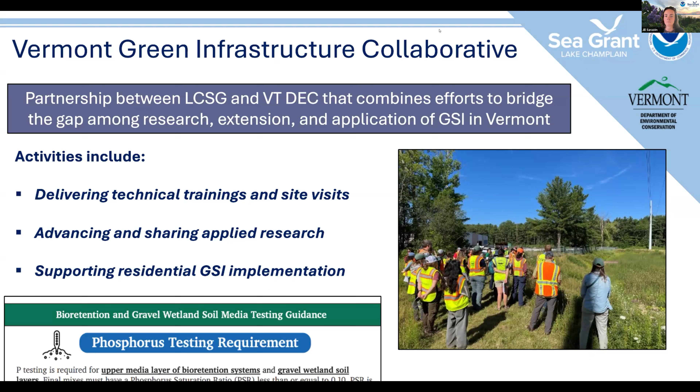I think you're on mute, Jamie. Thanks a lot. Yeah, thanks for having me. It's great to be here.

Gravel wetlands, or subsurface gravel wetlands, are one of my favorite topics. It's something that we started testing when the Stormwater Center first started in 2004. And as you'll see, it's one of our best performers.

If you're not familiar with a gravel wetland, it's largely a two-cell horizontal flow subsurface wetland system. I say subsurface because there's really not standing water on the surface in the basin geometry where the water quality volume is stored. All the action is happening underground as it travels horizontally through this network of gravel interspersed with the dangling roots of the different wetland plants growing in the system. So it's great if you have the space.

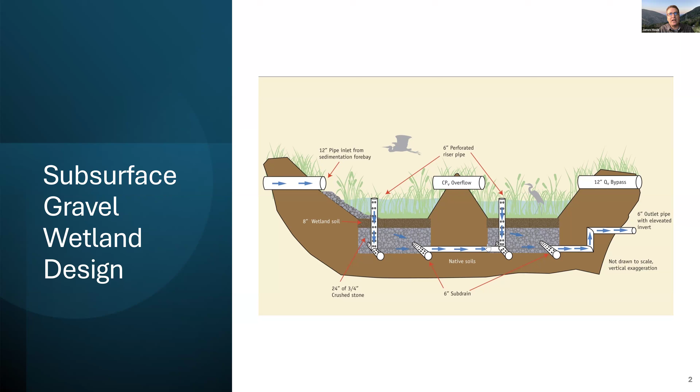Really, the two big things around gravel wetland installation are ensuring that you have low conductivity subsoils, such that the water is traveling in a horizontal direction as opposed to a vertical infiltration direction, and construction of an outlet control with an orifice that drops the internal storage, or basin storage, within a 24 to 48 hour period.

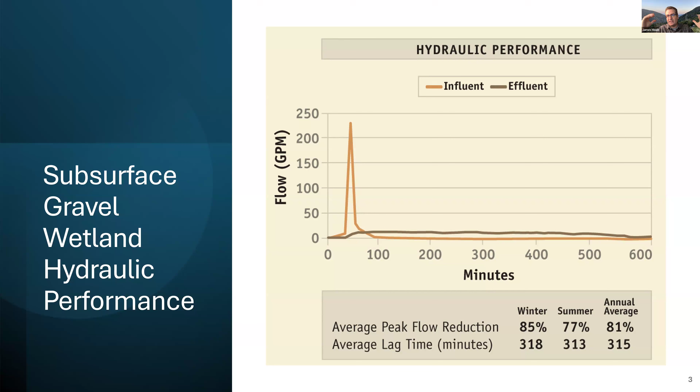When we look at the water quality treatment, as I said, it's probably our top performer. It might only be rivaled by, say, a permeable pavement system, where the vast majority of treatment we're expecting happens through infiltration into the native subsoils. But from actual chemical processing, this system by far is one of our top performers.

When we look across the range of unit operations and unit processes that the system employs, it hits about every one known in the stormwater engineering world. So everything from settling in the forebays to vegetative uptake to microbial mediated denitrification in the subsurface saturated zone, and adsorption and others as well. I think it's the microbial aspect in the subsurface that is really doing the bulk of the work.

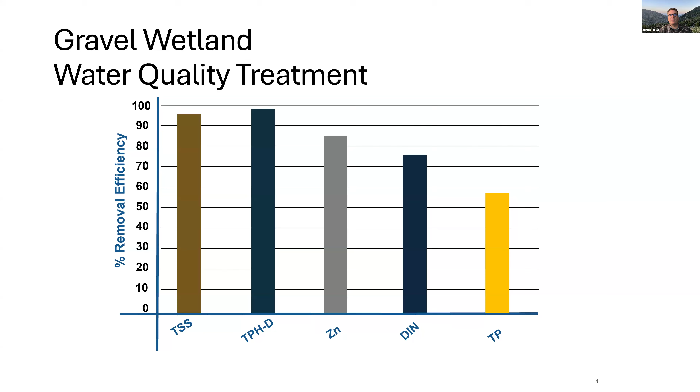I should at least note that everything I'm going to say today is embodied in our gravel wetland specification, which we update periodically. The last update was 2022. We're getting ready to update it again with a lot of the phosphorus testing criteria that Dr. Eric Roy and Dr. Stephanie Hurley have come up with at the University of Vermont. We work closely with Vermont, and I think Vermont holds a special place as probably the earliest and most prolific adopter of subsurface gravel wetlands as a treatment system.

When we look at the range of different treatment characteristics, of course we're looking at that water quality volume, which is largely still how we're designing a system, although that's slightly changing.

So when you look at resources like the Southeast New England Program retrofit manual and even the most up-to-date New Hampshire manual, you'll see some variability. We're transitioning to use of the performance curves that are embodied in Appendix F of the Massachusetts and New Hampshire MS4 permits as a way to really quantify the performance of our structural controls.

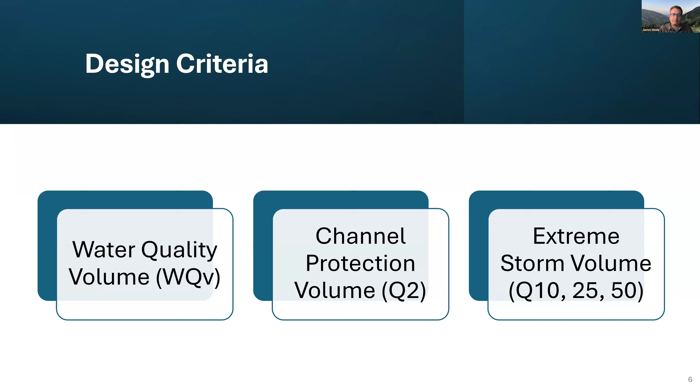All right, so pre-treatment is one of those things that we've kind of changed our opinion on. In most stormwater manuals throughout New England, a structural forebay is required. We've seen problems even within our gravel wetland systems of that structural forebay sometimes being designed dry, which is necessary in the subsurface gravel wetland, but often operating wet due to settling or other things that may be happening in that forebay.

So even though in the stormwater manual they might call for a volumetric forebay design size for 10% of the water quality volume, we have allowed for things like upstream, offline, deep sump catch basins to provide that pre-treatment. This, at least in New Hampshire, requires a waiver from alteration of terrain, but oftentimes that's no problem. We know that functionally the forebay really is there to provide a quick and easy accessible area for more routine maintenance. So that's really the ultimate goal.

And then the two treatment bays are sized for 45% of the water quality volume each. There's been a lot of discussion around why 2 treatment cells, and the short answer is because that's what we studied. This was originally borrowed from the Georgia State Manual.

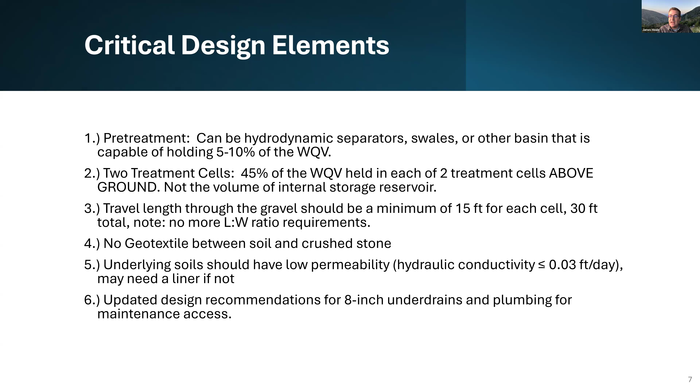Underlying soils, again, for the subsurface gravel wetland, should have low permeability, and that's to force that horizontal flow. We've also updated our guidance for any subsurface underdrains across any structural control to an 8-inch minimum pipe. And that's mainly for maintenance access in the post-construction condition.

So again, I won't go into too much detail, just limited on time, but a lot of this information is in our specification. The general anatomy of a gravel wetland is a 30-foot travel in the subsurface of stone, could be 3/4-inch stone, that's most typical, but we've also seen a range of different stone varieties. The key is that you have this intermediate layer, which is this pea gravel, and it creates a setting bed that allows the more fine materials above it to set above more coarse materials.

So there is some variability within the specifications of the stone layers, but typically it's a 3/4-inch stone that's widely available here, with that intermediate layer being a pea stone or 3/8-inch stone. And then, of course, the key is all in the outlet structure. If you don't have low permeability soils, you might consider using a different system.

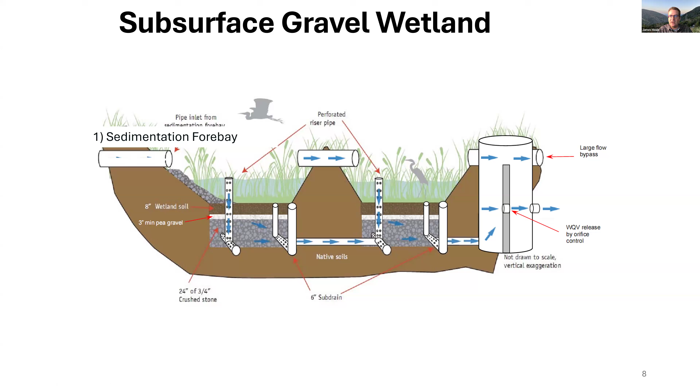If you need nitrogen control in particular, we've been modifying bioretention systems with internal storage reservoirs, which provides the same denitrification as the subsurface gravel wetland. And I'll show you a little bit of some of the advancements with the hybrid systems at the very end, time permitting.

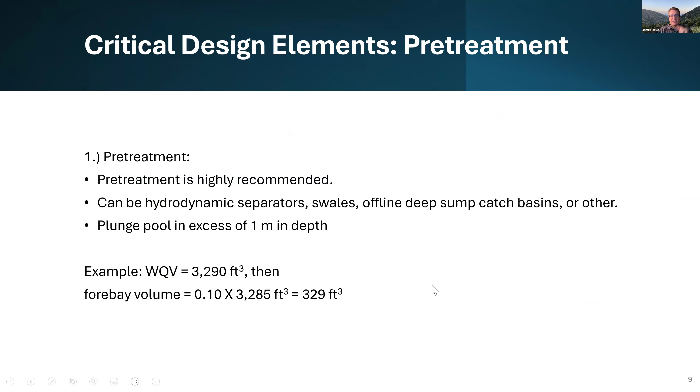So for pre-treatment, I discussed that commonly a volumetrically sized forebay is used, but there are other options. I don't want to limit your creativity to only a volumetrically sized forebay. One of the other areas we've innovated is around the hydraulic inlet.

If you think about the muck soil, as Vermonters call that wetland topsoil, it's really critical that we get that right, because we're not trying to promote vertical infiltration. If that muck soil is too permeable, like a typical bioretention soil, you could get short-circuiting of the plug flow path, which is really important to a horizontal flow gravel wetland system. By plug flow, I mean we create a hydraulic inlet at the front and push water horizontally through the subsurface. If we have too much infiltration down at the end of the system through the soil, that interrupts and short-circuits our plug flow conditions, which we feel is very important to overall treatment performance.

We used to use perforated risers as the hydraulic inlets. They can clog, and we noted a need for redundancy in these systems, since it's very hard to maintain these perforated risers. So we've since modified the inlet.

Where you have your inlet pipe into the gravel wetland area, we've modified that with a splash pad using 4 to 6 inch large diameter stone overlaying a woven geotextile. There are lots of reasons why we use woven geotextile—I won't get on my geotextile soapbox because that'll take a lot of time—but we use woven mainly for durability and maintainability. We can remove that 4 to 6 inch stone periodically and replace the woven geotextile over time. That's been the big modification on the hydraulic inlet.

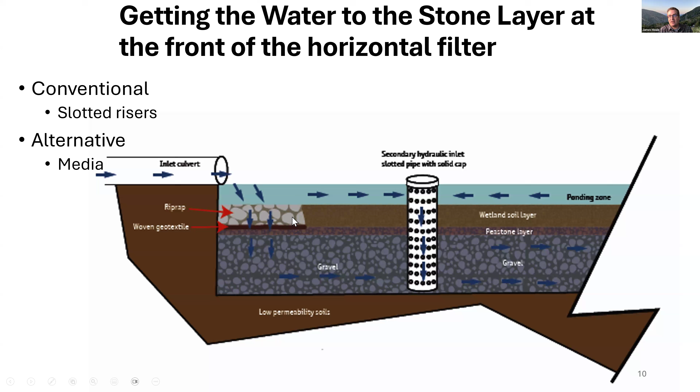I'll talk about the muck soil layer—that's an area of continued research and development, and I'll go into that a little bit later.

The next, and almost most singularly important, area is the design of the hydraulic outlet. If nothing else—if you have low permeability soils, which is often difficult for engineers developing stormwater management in areas with poor soils—this system is very amenable to the use of a subsurface gravel wetland. If you don't have those soils, you'll need some type of liner.

Outside of the low permeability native soils requirement, the outlet structure does pretty much all the rest of the work. In the outlet structure, we have multiple flow controls. The primary flow control is a low orifice sized to drain the water quality volume, or the upstream retention volume, over a 24 to 48-hour period.

The invert of that outlet control is elevated so as to maintain an internal storage reservoir of water. That reservoir is key because, between events, it takes the oxygen that's in stormwater and drives it down through microbial activity to anaerobic conditions, relatively quickly—within hours of a storm event. We'll see oxygen that comes in during a storm drop to about 2 milligrams per liter of dissolved oxygen, which is really important for denitrification to happen. That's why we maintain that internal storage reservoir.

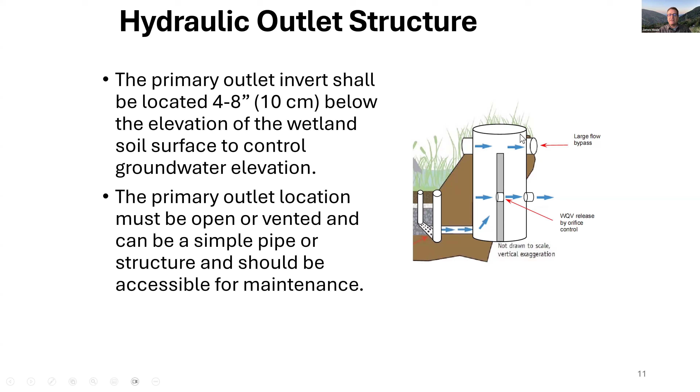The next controls are, again, to control the channel protection volume. You'll have another outlet control—sometimes a weir, as shown in this outlet structure—designed as the secondary control to bypass the Q2 event. Then you'll have some high flow contingencies as well.

Let me go into the next big innovation we've come up with on the outlet control, mainly from inspection and maintenance of these systems. It's really important, when designing your outlet control, to maintain that the clean side of the orifice receives only clean flow. I have some pictures to show you some of the mistakes that we've made.

The reason being, that orifice control can sometimes be as small as an inch. If you have water coming into your outlet structure that's skimmed from the surface and might have organic debris, or is conveyed from other areas with higher coarse sediments, that outlet structure could clog.

It's really important that on the clean side of that orifice control, you're only getting filtered flow from the underdrain of the gravel wetland. You could have a solid access cover on the clean side for maintainability or inspection, but your grated drain is on the dirty side of the orifice control, so that any debris or organic material is flushed through the high flow outlet and not getting stuck on the clean side of that orifice control.

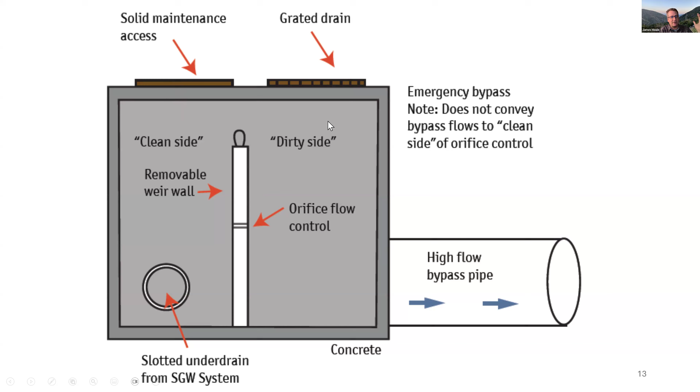That's the thing we're trying to correct. And there it is with the high flow bypass. We got the grated inlet here, right? But again, we would minimize or eliminate this altogether. Alternatively, you can put that bypass in a notch in the side of the structure, or you can provide another contingency for high flow bypass around the structure itself. So there's other ways to do it. Just do not let dirty water on the clean side of that orifice control.

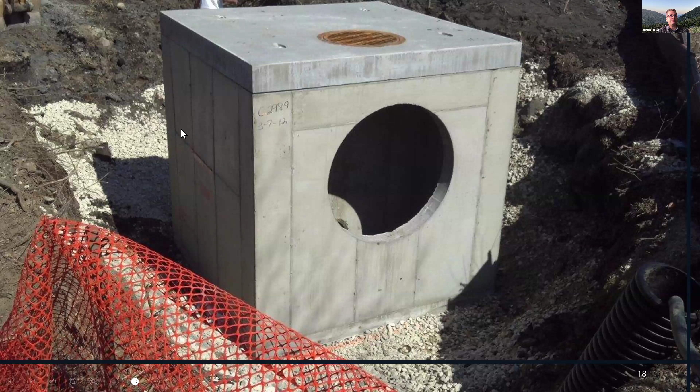Outside of that, there's really not much to it. There are additional criteria, again, for the muck soils. This specification is on our website. It's also in the new New Hampshire manual that just came out in February. In addition, I know that Vermont has specifications for this as well, and I looked at them in preparation for this, and they're basically the same.

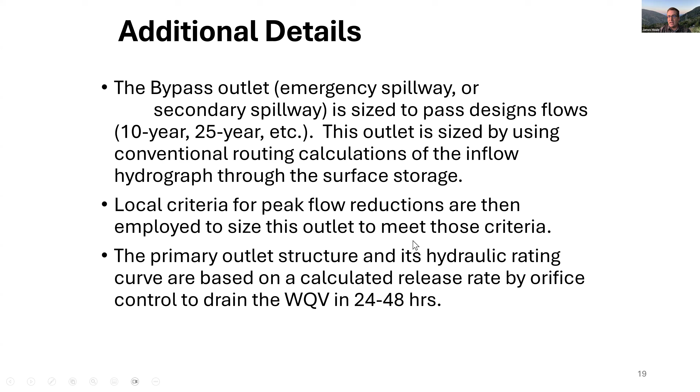The difference is updating the testing of the wetland soil with respect to the soluble reactive phosphorus, and using more of the Mehlich-3 digestion in order to assess that. I'll go over that a little bit later. So the wetland soils covering the surface should have low permeability, as opposed to what we commonly prescribe for bioretention soils. And again, the idea here is you want horizontal flow through the stone. You don't want vertical flow through the soils, which is the complete opposite of how we design bioretention, which is more vertical flow dominated.

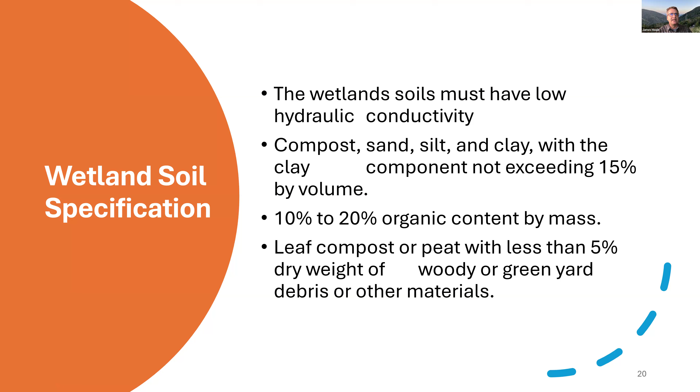Early on, we said this should be a mixture of everything: compost, sand, silt, clay, with that clay component not exceeding 15% by volume. We were worried about cracking potentially of that soil with greater clay content. If you just use a straight up wetland soil, as the system dries out, which it's prone to do in this type of application, you could get cracking and opening of surface cracks on that wetland soil, and thus short circuiting of your horizontal flow path. So this is kind of the science in trying to get the right mix: 10 to 20% organic matter by mass.

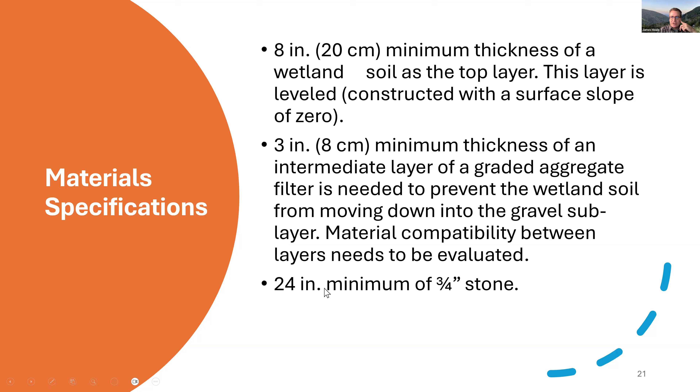We've seen all kinds of different things as far as that wetland muck layer. In the subsurface, it's a lot easier. We have an 8-inch thickness of wetland soil minimum, then a 3-inch intermediate layer, often just pea gravel, and then a minimum 24-inch gravel in the subsurface. So pretty easy to construct from the bottom up.

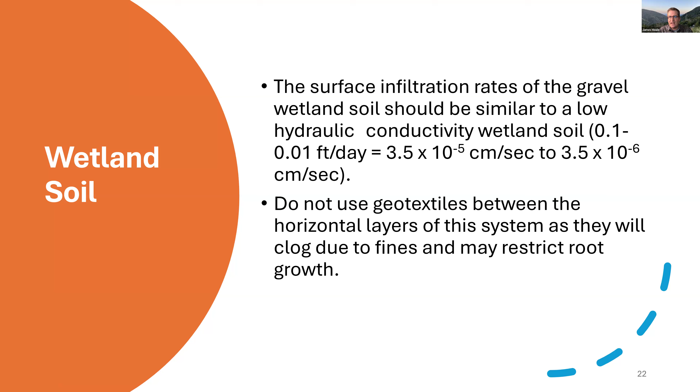We don't want geotextiles in the horizontal cross section of a bioretention because we're worried about clogging. But here too, you have wetland plants and you want those roots to go into the saturated zone in the gravel subsurface, and a geotextile could potentially block those plants, or at least not facilitate their migration into that internal storage reservoir. So we don't like the use of geotextile.

Like I said, we got all kinds of mixes. The most humorous one we got is they prescribed gravel, that pea gravel, all the way to the top, and that certainly is not something we're looking for.

The other issue we've seen is people mixing existing soil from other sites, which I think is a great application, but they could have rocks or other woody debris. We rejected a couple of soil samples with huge, like 3-inch boulders, and a 3-inch boulder has a risk of potentially bridging that 8-inch minimum wetland soil. Or things like logs—we had big branches, 6-inch diameter, feet long. When we have stuff like that, what we're worried about is bridging the surface to the subsurface and short circuiting that horizontal flow.

So our best approach was to develop a particle size distribution, which we did, and updated in our new specification that has some tolerances for too big of material and some tolerances for that particle range of what that material should be. Again, it's a work in progress. This is not an exact science, but you should have an eye on that material to avoid vertical infiltration over the long-term operation of the system.

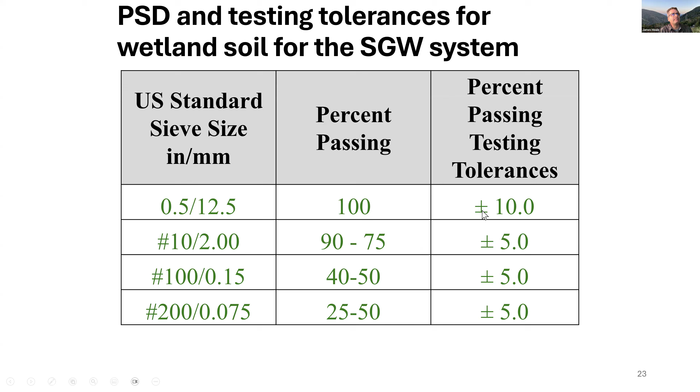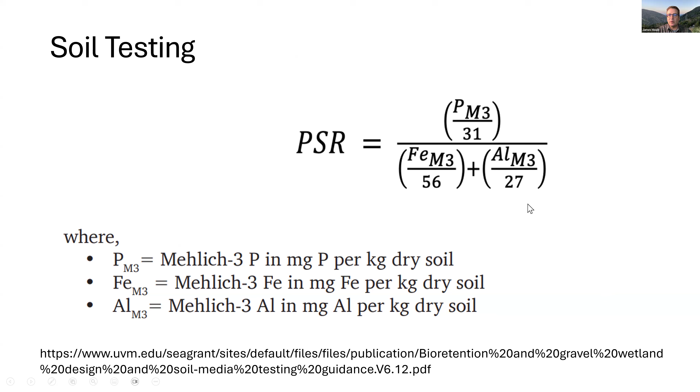For soil testing, we used to prescribe things like phosphorus index, typically done in an agricultural lab, but UVM has helped us update this, and we're stealing this directly from the bioretention and gravel wetland soil specification that Jill showed earlier. That will be in our spec coming out soon. It requires more of the Mehlich-3 and evaluation of the phosphorus saturation ratio component, because we don't want those soils contributing to excess phosphorus.

Vegetation is the other really difficult piece here. We've opted for seeding it just because these wetland soils come from all walks of life. They're in all different locations—some are shady, some are sunny—and purchasing a seed mix is probably the most suitable for self-selecting the wetland plants that will grow.

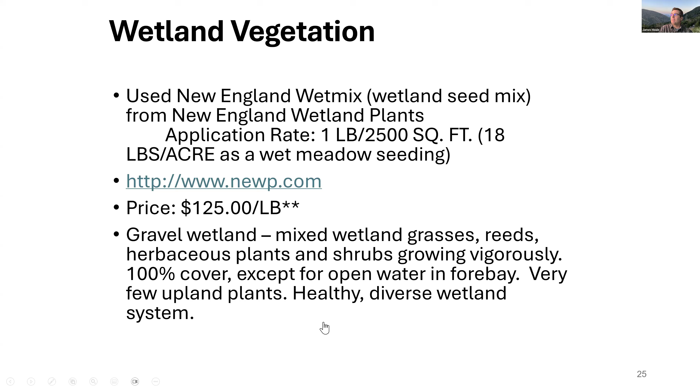We have accepted gravel wetlands that were temporarily stabilized with a contractor mix. I think that's fine, but over time we'd like this to be functioning with wetland plants, and the beauty of a system like this is obligate and facultative wetland plants can grow in it and benefit overall pollutant reduction.

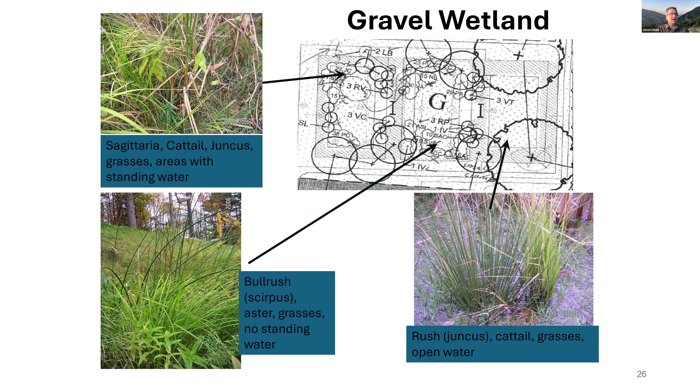In our original installation, we had done lots of plugs and potted wetland plants. We found about 53% of the planted species were still present, which is good, but that means 47% of what we planted, probably about a $20,000 planting pallet, had just disappeared.

So they're a mix of obligate and facultative species. The key to eliminating some of the more invasive species that may come in is having that early, dense vegetation before the system comes online, making sure the vegetation is dense and well established in the system.

Other questions that have come up over the years are with respect to ponding depth. One of the benefits of a system like this is you can potentially deal with peak flow controls and have more storage area available for larger storm events because it is temporary.

We don't really have guidance on ponding depth—it really goes back to sustainability of the plant species selected. More ponding means that's going to selectively control what plants are able to be sustained in that system. Our system itself that was tested was 18 inches ponding, which is where we settled on a preferable level. But again, this is somewhat flexible, and I think it's more akin to what you're planting the system with.

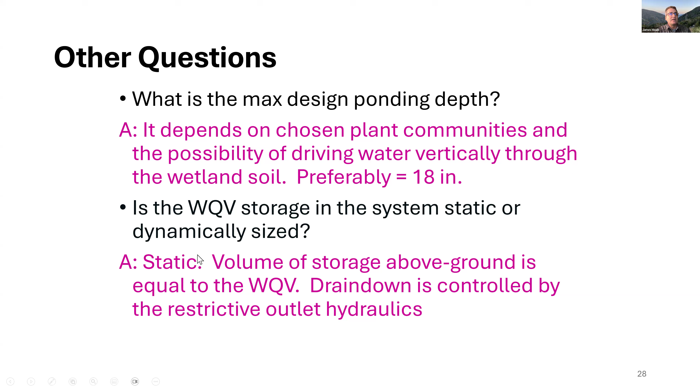Next, how important is a two-cell treatment approach? We've had long conversations with our alteration of terrain program at our Department of Environment, and I'm pretty comfortable that any single-cell subsurface gravel wetland will be far superior than most other treatment systems that would be allowed—definitely compared to a detention or retention pond. So I don't have any issues with a single cell, although you might run into some issues with people wanting more data. I would love to have more data, but we just don't.

Is there any specific reason for the 30-foot flow path? That was just something we tested early on, and we found a 30-foot flow path across the whole system was really important for that plug flow and the water quality function we wanted to achieve. That was based on some simple sluice testing early on. So the 30-foot travel length is key—whether you have one cell or two cells combined, they should be a minimum of 30 feet of travel through the gravel.

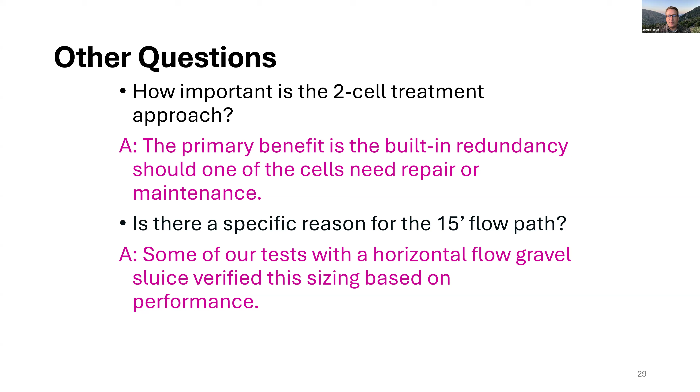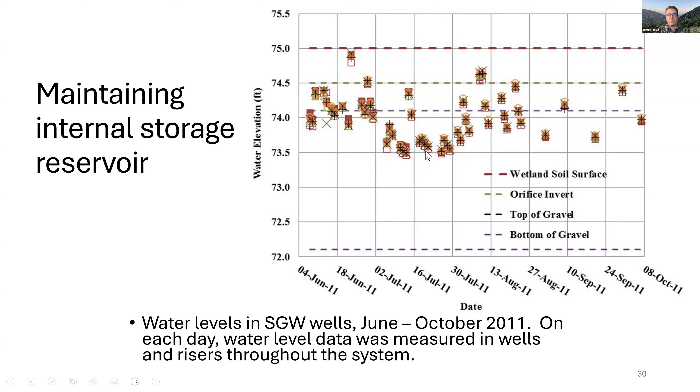So the question is, do we need to do something—do we need calculations to show that the water levels aren't going to drop? The answer is that there is some drop, but we're always maintaining over 1.5 feet of water in the saturated zone, which I think is fine for maintaining that anaerobic condition.

Last but not least, in the last few minutes I have, I want to go over: what do I do in a nitrogen-impaired area in a coastal environment where I want to use a gravel wetland, but I have good soils? That's really where we came up with this hybrid design. We have at least a CAD drawing of this on our website. This is relatively new, in that I haven't seen too many implementation schemes of this.

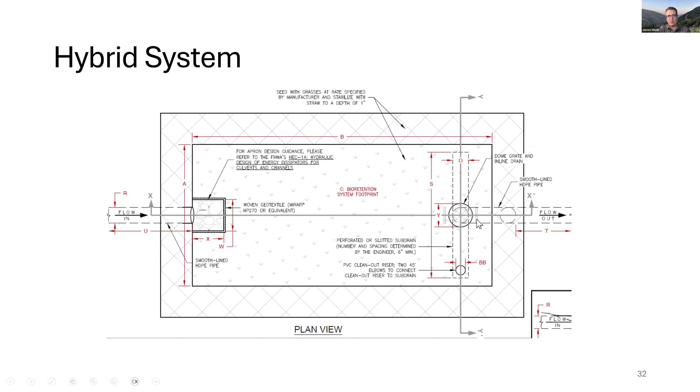We've seen a couple, but essentially what we're doing is creating this kind of plug flow path through the primary flow path within a system. In this depiction, you're seeing this hybrid system as the entire system, but we think of it like it could be nested within a gravel wetland style system. I'm not going to go over too much of the details—it's all included in that hybrid design spec.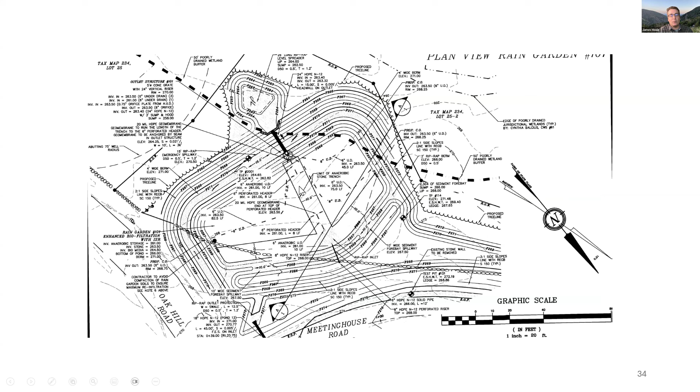This is an instance where this was installed because it was in a coastal environment, so alteration of terrain wanted them to do a hybrid system, but it was in a B soil. We didn't want to completely line the whole thing and eliminate the infiltration capacity of those good soils. Essentially, here's the bioretention system, and our gravel wetland system is nested in this primary flow path within the bioretention—this T section is essentially nested within that bioretention. That creates the first flush, and the primary flow path goes through this gravel wetland, and anything else spills out of the bathtub and goes through your typical bioretention style treatment practice.

So it's really the best of both worlds. We did install one and monitor it in the Cape, which is the most suitable spot for something like this, the bathtub hybrid system, and it performed wonderfully. When we looked at the performance, and we have a whole report on that, it's almost like you got a compound performance curve of an infiltration basin with a gravel wetland. So you got the benefits of both of those systems, and it really worked out well.

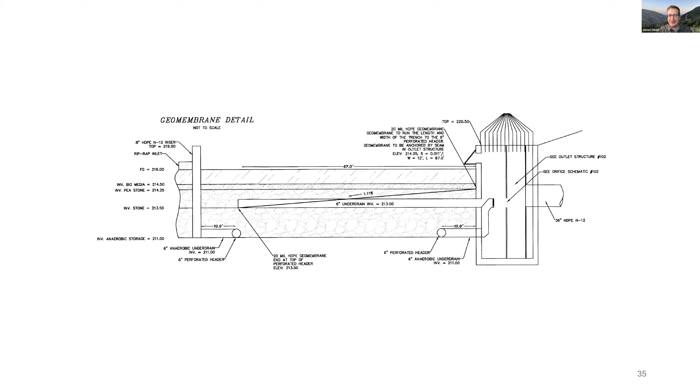We were happy with that. That was for EPA Region 1, and I think that report is somewhere on the web. You can email me and I can send it to you if you want to look at it further.

But I think that's about all the time I have. This does require maintenance, and that maintenance really is harvesting of the vegetation, not pulling it out, but cutting it back. I think that's probably one of the more problematic aspects.

This is our gravel wetland. This is the forebay, which was really functioning and designed being wet, and here are the two subsequent gravel cells. But because these are dry, we can, at least with students, get on there and harvest that material, and that's really the long-term maintenance. Every 3 years, 3 to 5 years, we're harvesting that and composting it outside the system.

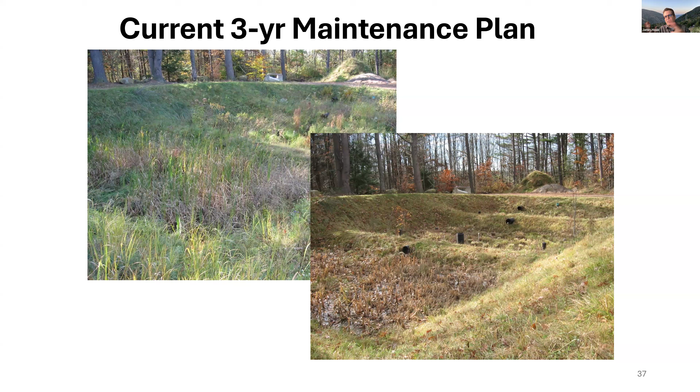So I think I'll end there, and I think I'm right on time. Oh, 1 minute over, sorry.

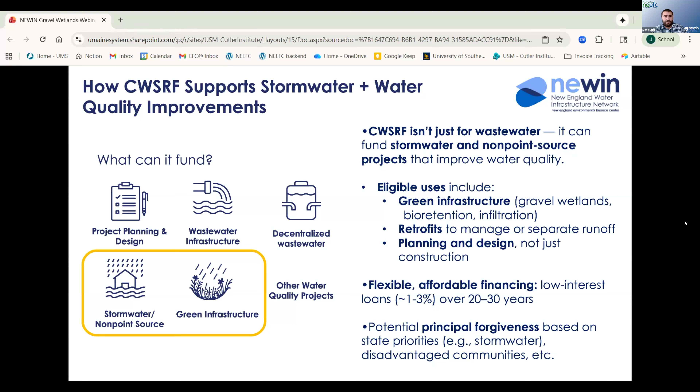Many states can even offer principal forgiveness and other subsidies for projects that meet priority goals, or if your community meets disadvantaged criteria. A good example of this is in the New England state of New Hampshire. They have forgivable stormwater planning loans of up to $100,000, which is a great tool for communities just starting out to plan stormwater projects and may not want to take that next step.

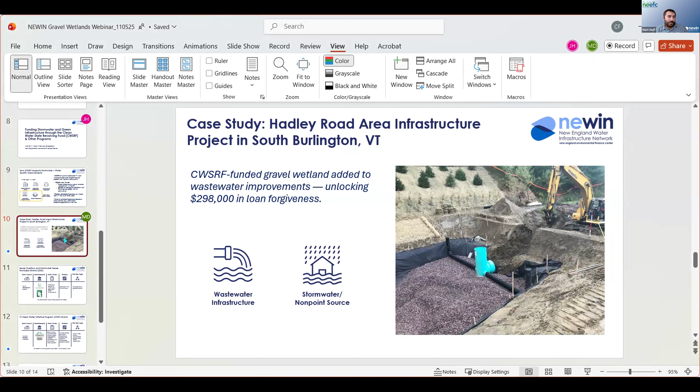A good example of using the CWSRF for these projects, which also includes a gravel wetland, is back in 2020, the Hadley Road Area Infrastructure Project in South Burlington, Vermont.

Vermont's CWSRF program has a special feature where it lets communities bundle green infrastructure like gravel wetlands into larger wastewater projects, and they can qualify for grant equivalent funding for the green portion. In this case, South Burlington added a gravel wetland to treat stormwater runoff as part of a wastewater and stormwater separation project.

Because they included that green infrastructure piece, the state awarded them a $298,000 loan that was fully forgiven, basically turning that portion into a grant. So adding green stormwater infrastructure can trigger loan forgiveness.

Although this is unique to Vermont's program, it's a good example of how having that great incentive allows communities to think about green infrastructure as an integral part of their SRF eligible projects, not just an afterthought. A big part of our NEWIN team's goal is to help communities throughout New England look at their SRF program and see what incentives are available to create bundle packages that unlock as many incentives as possible.

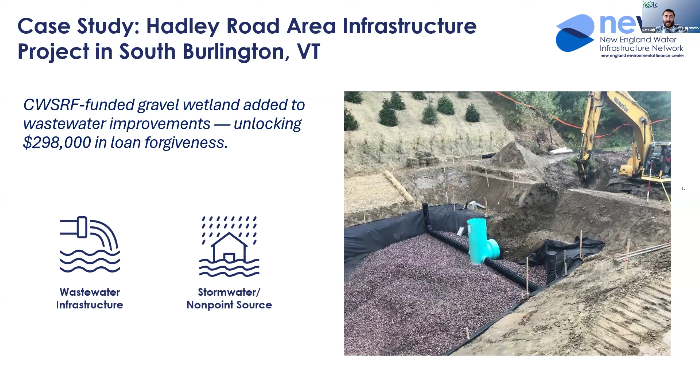Next, I'm going to touch on another grant funding program available in all New England states, but speak more specifically about the program available in Massachusetts. This is the OSG program, the Sewer Overflow and Stormwater Reuse Municipal Grant Program. It's funded by the EPA, but just like the CWSRF, it's managed at the state level, meaning municipalities apply directly to their state environmental agency, not to the EPA.

The EPA gives each state an allocation of OSG funds, and the state distributes that money to local communities - cities, towns, or utilities eligible for sewer overflow or stormwater management projects. The main focus is on projects that reduce sewer overflows or improve stormwater systems.

In Massachusetts, the OSG program is especially valuable for early stage stormwater work. It can provide up to $250,000 for planning and design before construction even starts. It's important to remember this is grant money, not a loan, so unlike the SRF fund, there's no repayment required.

This makes the OSG a perfect fit for communities that don't yet have a full design or funding strategy. It helps take an idea or stormwater concept and moves it to what we like to call SRF ready status. The OSG program also typically gives priority to disadvantaged or smaller communities, typically those with a population under 10,000.

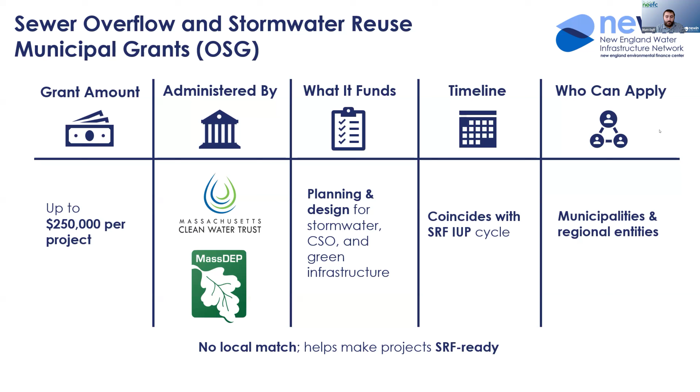Next, I'm going to speak briefly and more generally about Vermont's CWIP grants, which stands for Clean Water Initiative Program. This is Vermont's main grant source for stormwater and water quality projects. The first thing to know is this is not a loan, it's grant funding, which means communities can make real progress on water quality projects without taking on new debt.

So what can CWIP fund? It can fund a pretty wide range of stormwater improvements, including green infrastructure retrofits, stormwater system upgrades, and wetland restoration or other nature-based solutions. It's a really flexible program that covers both traditional and green stormwater approaches.

CWIP is a great fit for smaller projects or work that doesn't necessarily fit neatly into a CWSRF loan. The program usually has multiple funding rounds each year, so communities might not have to wait long to apply. It works well both at the concept level, for early planning and design, and for more implementation ready projects that are ready to build. So it offers good flexibility.

In many cases, you can pair CWIP with CWSRF funding. CWIP might cover the green infrastructure elements, the parts that directly improve water quality, while CWSRF helps fund the larger infrastructure components of the project.